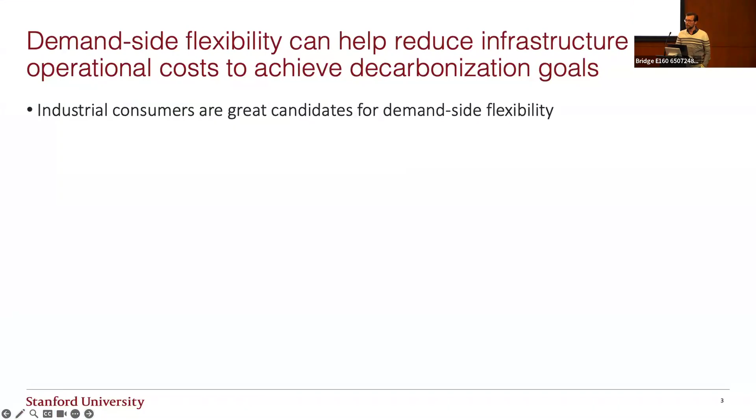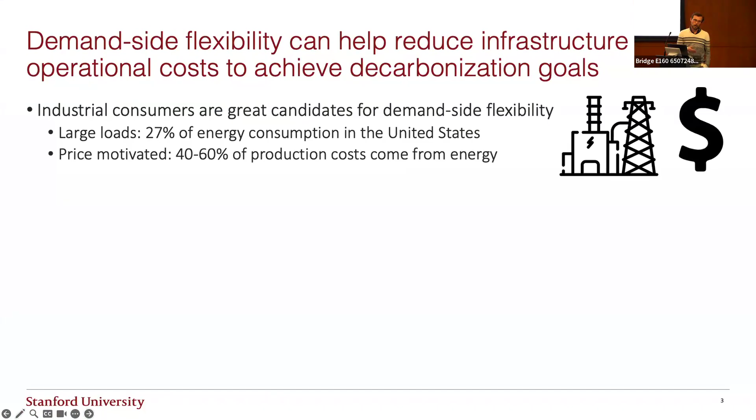So some motivation. We, as Taylor was talking about, have done a lot of research in demand side flexibility and how that can reduce infrastructure operational costs and help achieve decarbonization. A couple of statistics. Industrial consumers use 27% of the energy consumed across the United States, so it's quite a large fraction. And in some ways, more importantly, they're price motivated. Around 50% of costs of most industrial processes is just their energy consumption. That's true for water facilities, but also other manufacturing processes, for example.

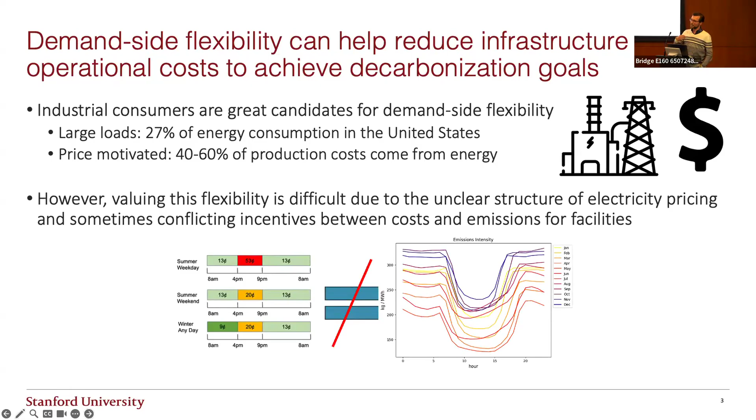So that means that they're very driven by these time of use price incentives. A lot of times they'll have, for example, in California, more expensive electricity between 6 and 9 p.m., let's say. The problem from my environmental engineering perspective is that the emissions intensity does not line up with those costs. We've done some research looking at the emissions and price signals, and in summary, they're misaligned, meaning that if I were a rational, flexible customer, I am more likely to increase my emissions compared to flat operation than decrease them. And again, as an environmental engineer, I argue that is bad. We want people to be price incentivized to decrease their emissions. So that's the question: how do we understand these complex price signals and emission signals?

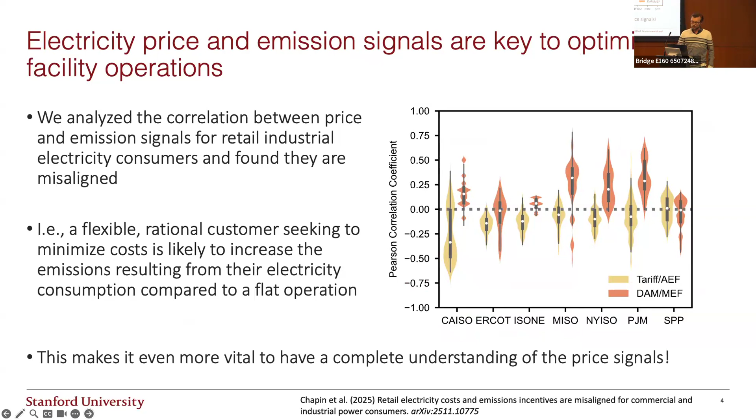For a little bit of background, I spent a lot of time thinking about the electric grid, but from the point of view of a consumer. So very different than an electrical engineer. This is more like, how does this electricity tariff work? And that's a lot more complicated than you might think. There's a demand charge, which is your peak consumption during the month usually, or during a certain time period of the month. You might have a peak demand charge from 6 to 9 and an all day demand charge for any of the 24 hours. You'll have an energy charge in dollars per kilowatt hour, which also varies in time perhaps. And then you'll have a flat monthly customer charge. And both of them could vary monthly and seasonally.

And then there's an added wrinkle, which I didn't appreciate because I didn't know what convex optimization was. You have these things called charge tiers, where on the x-axis is the optimization variable of energy consumption. If you have a charge tier, the cost function is inherently non-convex, because how do I know how much I'm going to consume before I've solved the optimization problem for how much I'm going to consume? So with these complexities, initially we just wanted to know the price of electricity at a wastewater treatment plant. That led to developing an entire package on how to calculate the price of electricity for any consumer, because it was a lot more complicated than we anticipated.

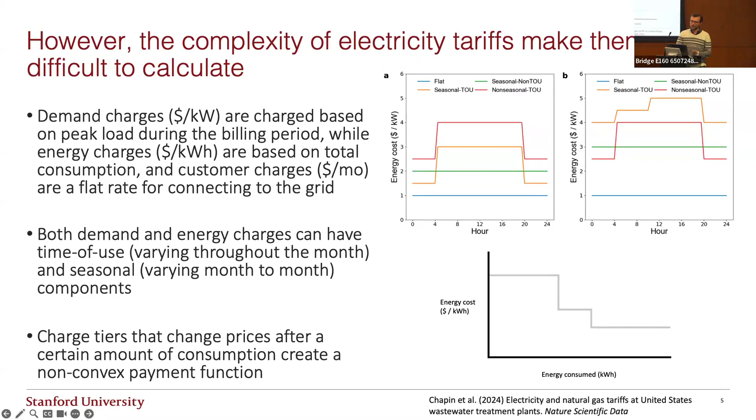So that leads us to the software architecture. You have a package called EECO, which I now realize I don't know if I wrote out the entire acronym down there: Electric Emissions and Cost Optimizer. So the goal is threefold. One is to just calculate an electricity bill of a customer. Two is to calculate scope 2 emissions. And three is to incorporate flexibility metrics, such as round trip efficiency.

So you can sort of think of that as turning any industrial facility into a virtual battery. So if you were able to measure for your facility what's the power capacity, energy capacity, and round trip efficiency, which we have a whole paper on as well that Akshay, who I don't think is here anymore, led. And so basically that's how you can model these systems.

And the goal is you come with your own model. So we're not doing anything with the optimization model. You come up with whatever constraints you want, whatever dynamics of your system. And we're going to produce an objective function of costs and emissions based on what input signals you give.

There are two helper functions, or helper packages, I guess, that help do this. One handles the unit conversions. So imperial units and metric units are commonly mixed in the United States electricity system. And it can be very annoying to try to figure out what the price is if you don't get the units right.

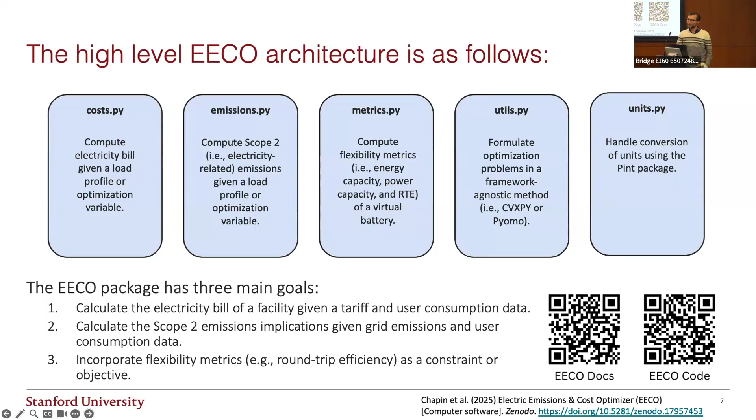And also, I guess maybe this is blasphemous at a CVXPY workshop, one of the big motivations of this is that it is agnostic to the optimization framework, meaning you can get an objective function for either Pyomo or CVXPY. That's very useful to us because we solve some of the models in our lab with Pyomo, some with CVXPY. This allows us to use the same costing package for either one. I didn't go into those details, but if anyone's curious, I'm happy to talk after about how under the hood I'm implementing functions that work with both.

There's an accompanying electricity tariff data set. So this is one of the things that I would like you all to take away, basically. If you're interested in optimizing your own system, not only do we provide a way to calculate the objective function, we provide over 1,000 electricity tariffs from across the United States. So you can go download this file format and just plug it in and get an objective function out that helps you minimize the cost.

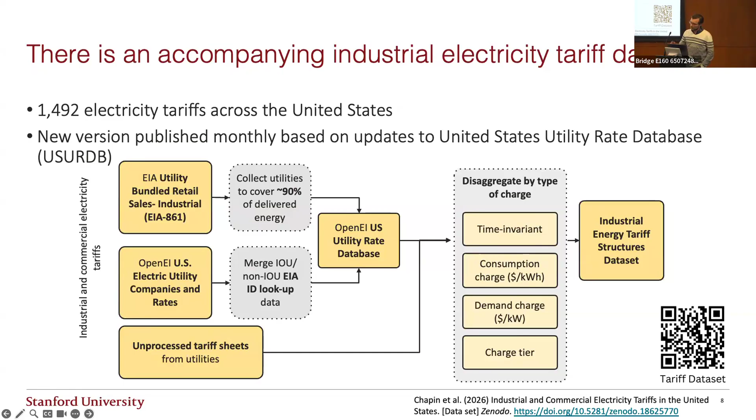And for anyone in the US, you can do something like sensitivity analysis around the country to look at how your system might work in different markets. That was a motivator to the initial development of this package. Again, I'm happy to talk more about this, but it's not the most interesting, so I'll continue.

And this brings us to the demonstration. So how do you actually use this package? If I have a model and I want to go calculate costs, first, this is without any optimization. So you just have a historical load profile, and you want to compute a baseline electricity bill. Again, we have a tutorial online, so if you really want to get to know the package, I would suggest you check that out.

And then you get a charge dictionary. This converts the CSV tariff file to a dictionary of NumPy arrays, basically. So it has, over the time period you asked for, what's the charge at each time step. And it could have dozens of different charges in this dictionary. And then there's calculate itemized cost. This is where, when I was saying it is agnostic to the framework, if you're using Pyomo, you pass in a Pyomo model and you get back a Pyomo model.

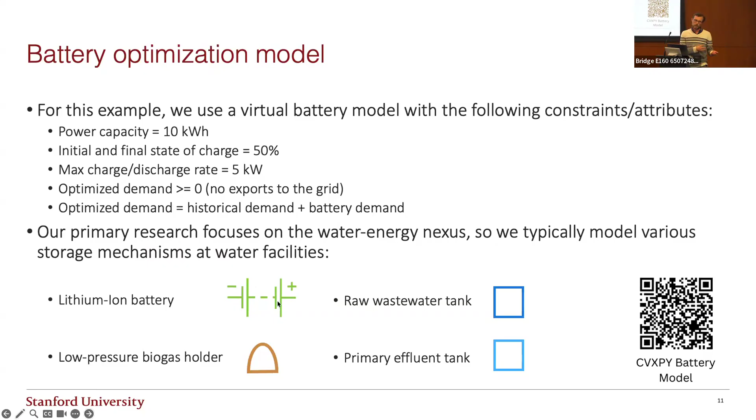As Daly mentioned, the primary goal of this package originally was for water flexible operation. So flexible operation of water treatment systems, where in addition to a battery, you might have storage tanks that you can operate flexibly. But the way you use this EECO package is the same. We just provide different constraints, a different optimization model, but we have the same exact objective function.

And what that would look like here, first of all, it's not shown here, but imagine that grid demand kW is just a CVXPY optimization variable, so it's a cp.Variable. You put it into a dictionary because you can also compute natural gas charges. Most people don't care about that, but for wastewater treatment plants, that's important, so we have it in there.

Again, here I got the itemized cost, but in this case, because grid demand kW is an optimization variable, what I was returned is a dictionary of CVXPY variables. So I add together the energy and demand cost, again ignoring the customer charge, and then just solve the problem. What I want you to take away is if you come with your own optimization model, with 3 or 4 lines of code you can compute an objective function for however complex of an electricity tariff you'd like.

Another very important note is if you are computing this in an optimization problem, please compute the cost ex post. You might be like, oh, why? You just computed the cost up here, why compute it again? If you access the value of the objective directly, there may be some convex relaxations applied, so the value of the objective may not be the true electricity price. So what you want to do is take the output load profile and recompute the electricity price with the NumPy load profile so that it's a static load, and you will get the actual electricity cost.

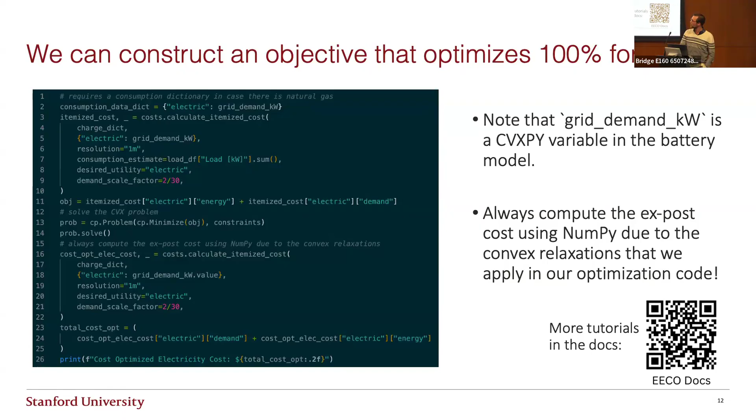Finally, you can also talk about emissions. Like I said, one motivation of this is you want to co-optimize costs and emissions. So the costing portion of this, you don't have to worry about so much. But for emissions, just know it's a similar, hopefully relatively straightforward thing where you get carbon intensity from a CSV file and then just put that into the objective function.

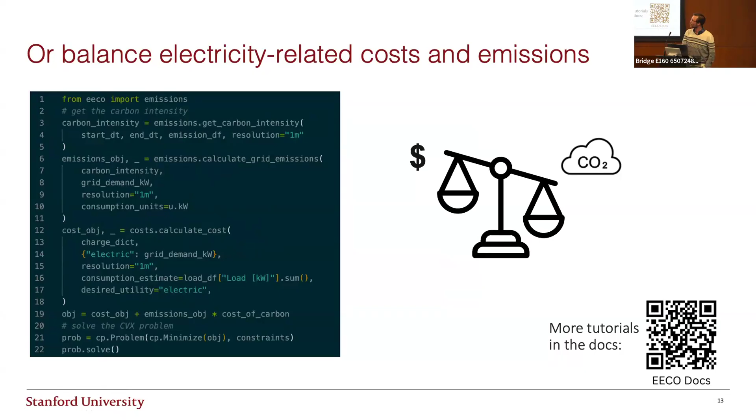I'll admit emissions are linear. It's not the same thing as demand charge and stuff. So it's a pretty simple problem. You probably don't even need this package if you know convex optimization, since adding the emissions to the objective is straightforward. But this way you can do it all in one package and then just co-optimize the cost of carbon. And this is an example of the output.

So like with the battery model, you'll see in blue was the historical load profile. In orange is the cost optimized demand. The first day of this is a weekend, so there's no peak charges, which is why they only care about this peak period during the 10th of April. And then the green is the emissions optimized.

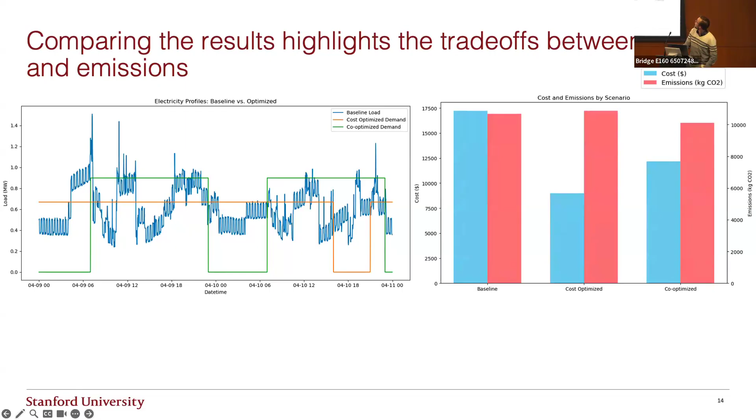And as you'd expect, overnight, when the emissions are highest, it goes down to 0. And when emissions are lowest in the middle of the day, because you're using solar energy, you have the highest consumption. So you can see how you have the different results with the different signals. And then also sort of just validating what you expect.

The costs are lowest for the cost optimized, in between for the co-optimized, and the lowest emissions is the co-optimized emissions profile. One thing to note, that I alluded to before, the emissions go up in the cost optimized case. So that was one of the initial things we're looking at. We would like the policymakers to rethink the incentives so that when you're cost optimizing, you're not raising your emissions.

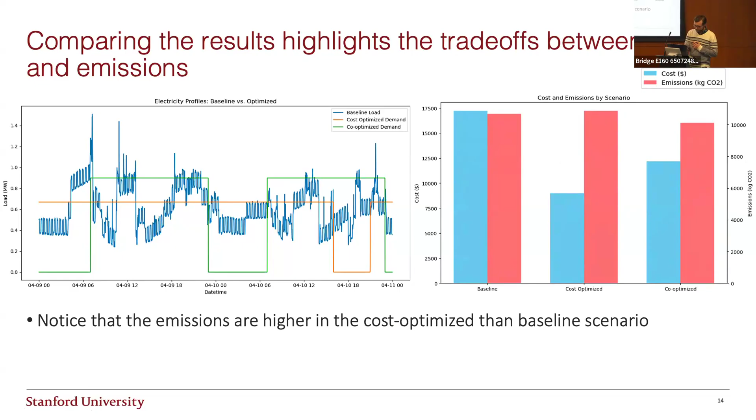And we have some planned improvements. We want to do some stuff to improve the emissions calculation. It's a bit clunky. Right now you can compute the flexibility metrics. We have functions that, based on a historical load profile, give you the round trip efficiency or power capacity. We think it would be interesting to actually make those optimization variables, because then that would be more like an optimization for design of a flexible system: if I could pick any power capacity, what would be the best one? So that's a hopeful feature improvement we'd like to add in.

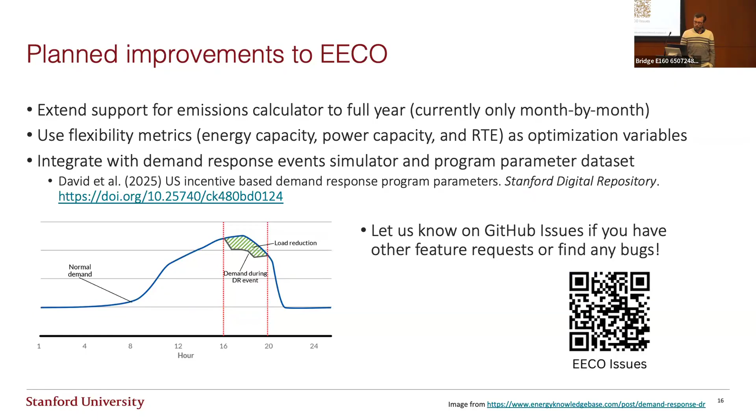And also, like Daly mentioned, we want to integrate this with some other work we've done on demand response. So you could have a package that's doing demand response and time-of-use pricing optimization simultaneously. This is definitely very much in development. So if you have any questions, feature requests, or you find any bugs, please let us know on the GitHub issues page.

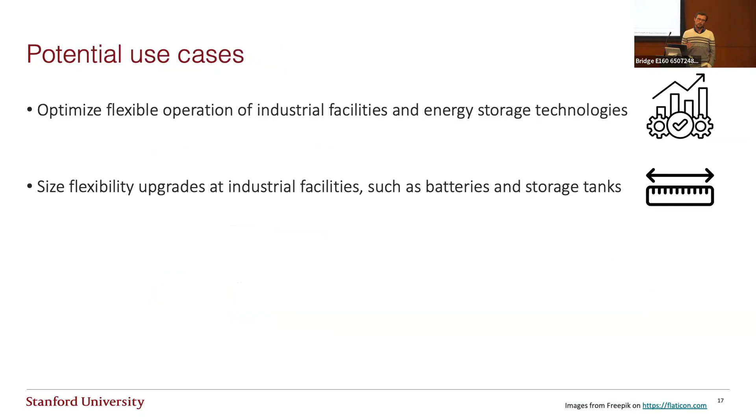And just to leave you with some potential use cases, you could do what we're already doing, which is optimal flexible operation. As I mentioned, you could size, so not just operation, but do some design optimization, like how large should my battery and my tank be. You could have tariff selection. A lot of times, especially in California, there's like 5 options, and a customer is like, well, I don't know which is the best one. You could optimize all 5 and tell them this is the one that gives the minimal cost across the suite of options, because you can loop through this package.

And I think maybe the most interesting one, which I haven't gotten to try yet, is actually informing the policy, where they can do hypothetical tariffs and see how a rational customer would respond to the price signal before it became a real policy. And that lets them make sure, I would argue, you should align the cost and emission signals, for example.